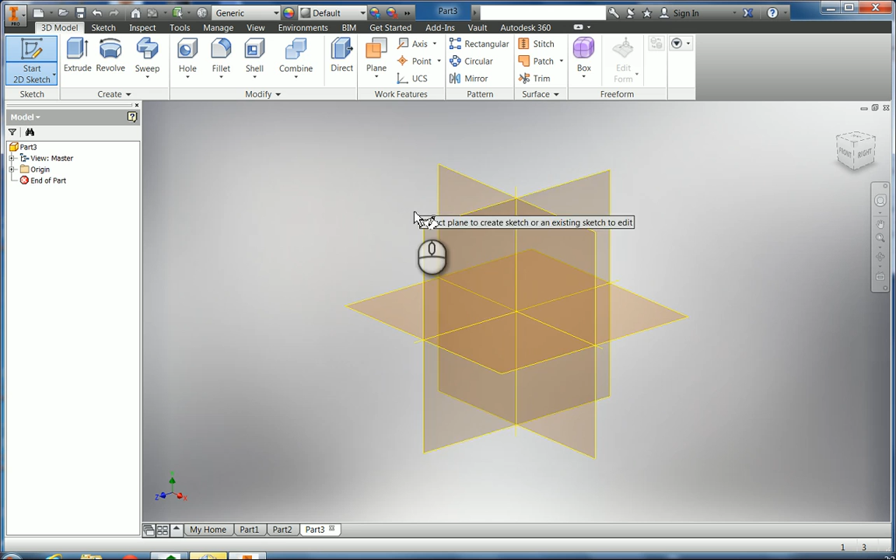This time we want to do the part 8, the holes. So we'll start a sketch, and we're going to make a little 4-inch diameter base plate for us to drill holes through. We'll finish the sketch there. We'll extrude that out to 1.5 inches. So we have a base plate that we're going to sketch things through here.

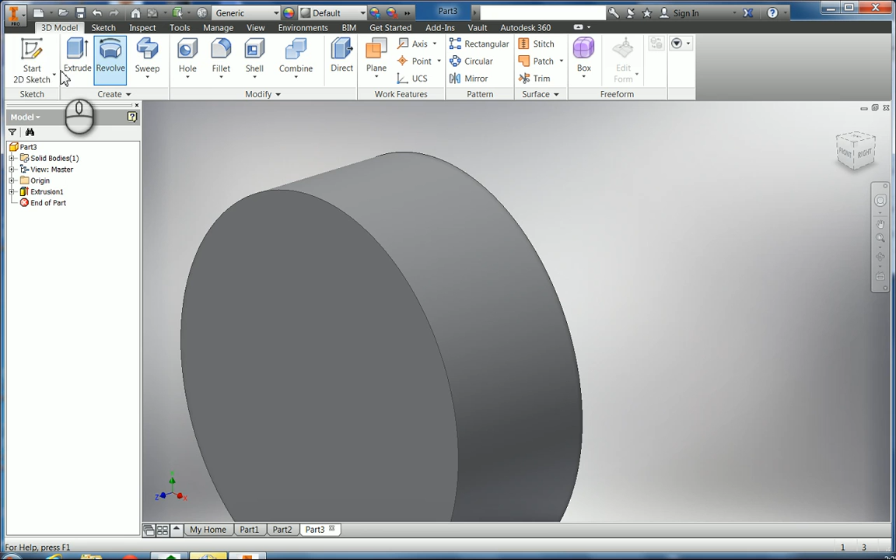So I'm going to start a new sketch on the front of here, and I'm going to put a point. I'm going to click point. Make sure over here its center point is highlighted also. And I'm just going to come up here a little ways and tab over, make sure my x is 0, but my y should be 1.25. So that's how far up above the center point I'm going to be.

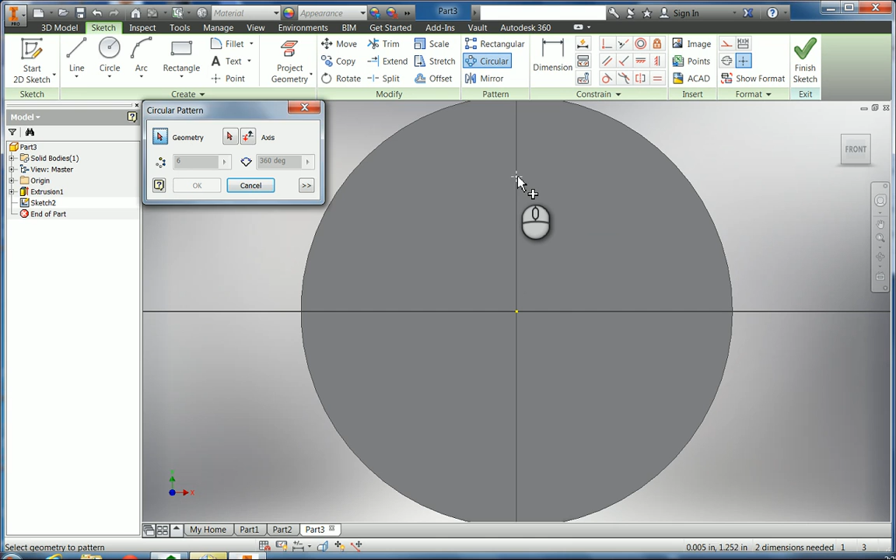And then I'm going to circular pattern that around. So I'm going to click circular pattern. I click the geometry of the point I want. I click the axis. I'm going to rotate it around that. I want to do it 6 times. I want 6 holes I'm going to put on here. So I have that good, and I can finish sketch there. And then I can put in the first hole.

So the way I can do that is I can come up here and click on the hole command, but I can also come right here and right click on that point, and I got the hole right there. And let's move this over here so you can kind of see what's happening. So this first hole is just a regular drilled hole. So I got these different things: I have drilled, this one's called counterbore, this is a spot face, and this is a countersink. So I just want it on a regular drilled hole.

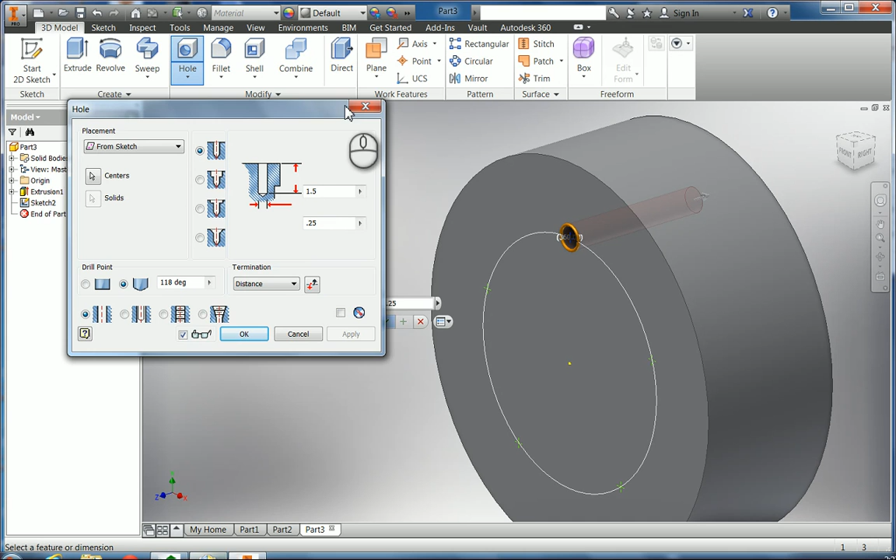And it shows you here the depth you want to drill it, and we want it to go all the way through. It says through, so that's going to be 1.5 inches. And then the diameter of the hole is supposed to be 0.25, which I guess it's already set on. And that's all we need for that hole. It's very easy. So I can click OK, or I can click this green arrow here, and I got my hole in there.

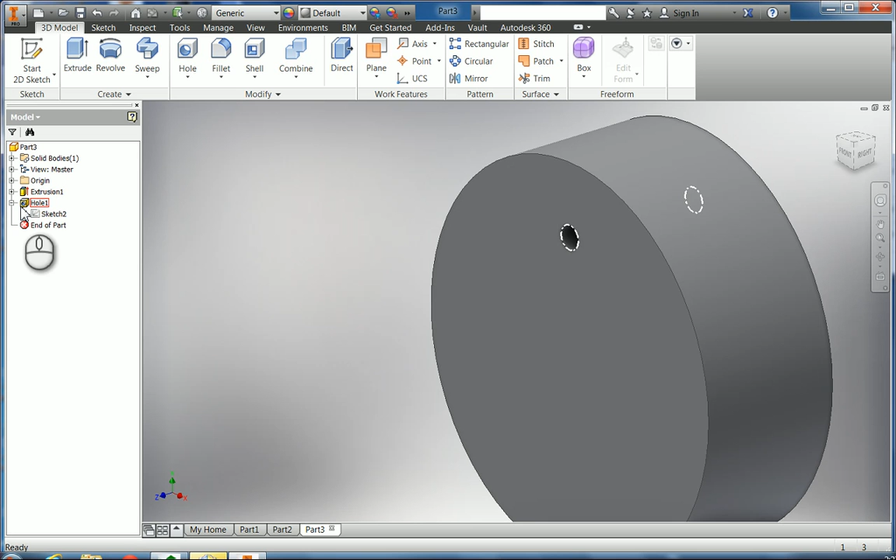Okay. So now I got to do the next hole, and you'll notice here that my points seem to be gone. That's because they were on my sketch, and that sketch is what we call consumed by the feature. The feature is the hole, and so the sketch was consumed by that, which means if I click on this plus sign by the feature, I see my sketch is inside there. So what I can do in that situation is I come here and I right click on the sketch and I share the sketch. So now I see I have another sketch out here that I can use, and there's my points again.

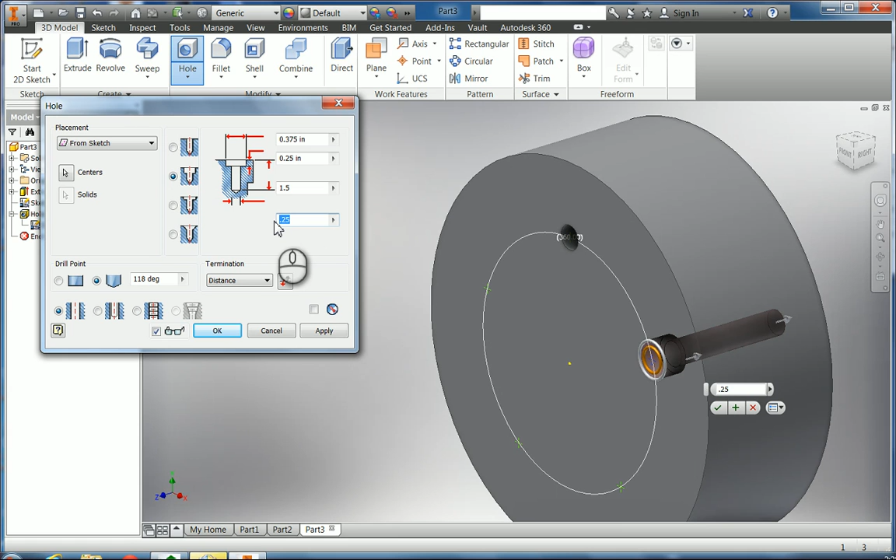So I could come here and I could right click on that next point and put a hole on that. And what's this hole? This is a counterbore hole, so I'm going to click on that. It has a diameter right here of 0.375. It has a 0.75 diameter head. The depth of that head is 0.25, which is good. And this thing needs to go all the way through, also 1.5. So I got all the dimensions on there that I would need for that one. And I can click the check mark here.

That's good. Okay. And so now you see hole 2 has consumed that particular sketch. But since I shared the sketch, now I have another sketch here available to work on. So I'm going to come down here on the next hole and right click on there and put hole on there. And what do I want to do on this one? This one is supposed to be a countersink.

0.375 is diameter, it's set right. 0.75 is the head diameter, that's right. An 82-degree slope on the countersink, which is correct. It's supposed to go all the way through 1.5, so it's all good. And I'll come down here and click that. Come down the next hole, right click, hole. Okay, what do I want on this one?

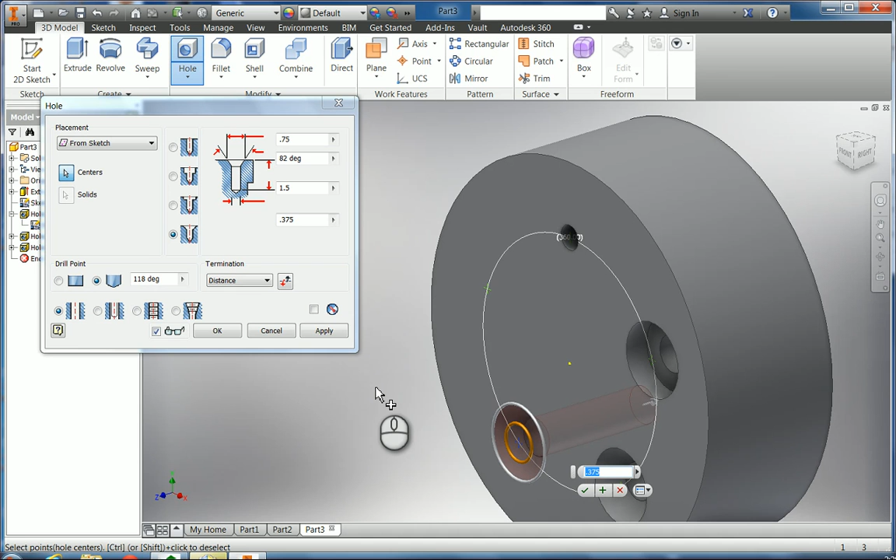Okay, this is threaded. It's a 1/4-20 UNC, unified threaded hole. And the 20 refers to 20 threads per inch. And the 1/4 is the diameter of the hole. So we want to come down here first of all and click on this threaded, the tapped hole, which means it's threaded on the inside. Come down here, thread type, we're on what we want, ANSI unified screw threads.

The size needs to be 1/4 inch, so 0.25. And then designation quarter. See, there's all kinds of choices here, but we want 20 threads per inch. 1/4 inch is a diameter. The class is 1B, and everything's good there.

Now, one thing that you can look at is, up here, it shows the threads going all the way down through. That's because we have full depth checked. If I uncheck that, you'll notice that now there's a distance to measure how far down the threads should go, and how far down the entire screw should go. We're going to go ahead and have it go the full depth. And we want that to be 0.75 inches down, which is what we're going to leave it at there.

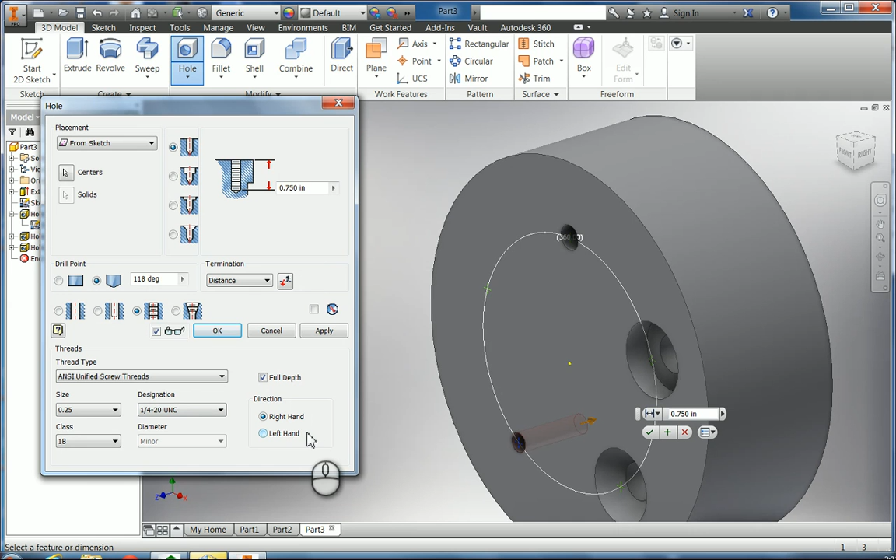Let's see. But we want a straight drill is what we want. That's not a countersink. We want just the regular drilled, 0.75 inches down, and we got all that right. Okay, that's all good. There's a direction of right-hand or left-handed threads also, but we're all okay with that. Click on that.

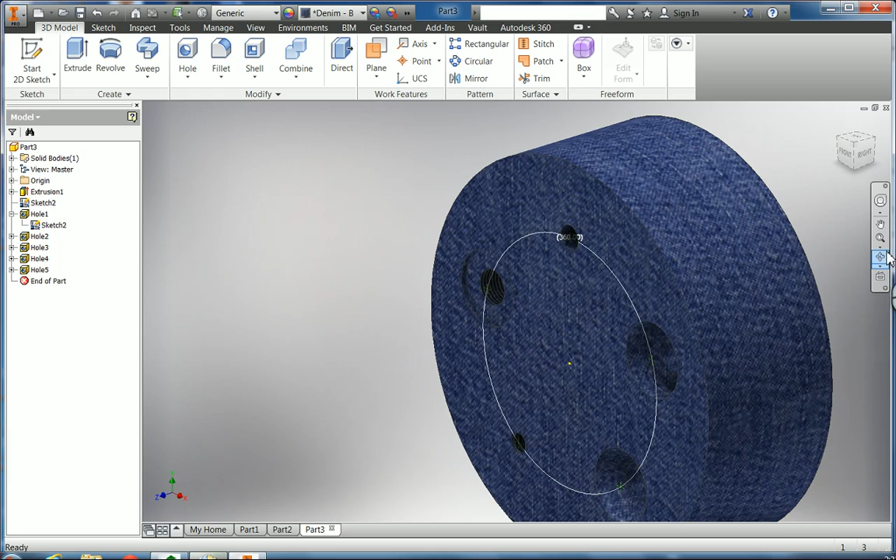Okay, 5th hole right here. Hole. That's your choice. We can do anything we want. Do a spot face, tapped, not full depth. Come up here and I'll make this blue denim. And of course, there's the holes, you can see. Oh, it didn't go all the way through, right? Okay, and you're supposed to put your initials on that also.